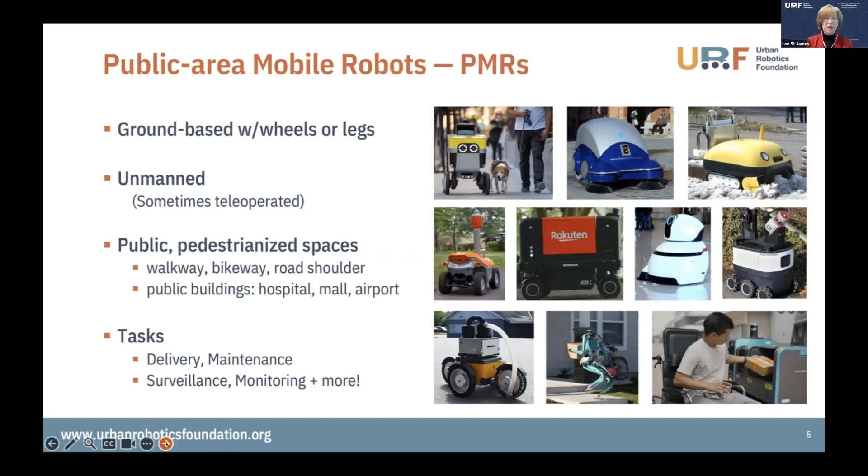So what are public area mobile robots? Our work focuses on just public area mobile robots. Peter brings a much broader perspective, which we'll be happy to explore. Public area mobile robots are ground-based, so wheels, legs, tracks - they can have two or four legs, as you can see in some of the diagrams or photographs here. They're unmanned. The key thing is that they are used in public spaces around bystanders or pedestrians, on any kind of walkway, bikeway, or public building, performing tasks that are basically unlimited right now. We have new use cases showing up every day, so we're excited to explore this whole area and help nurture the industry as it evolves.

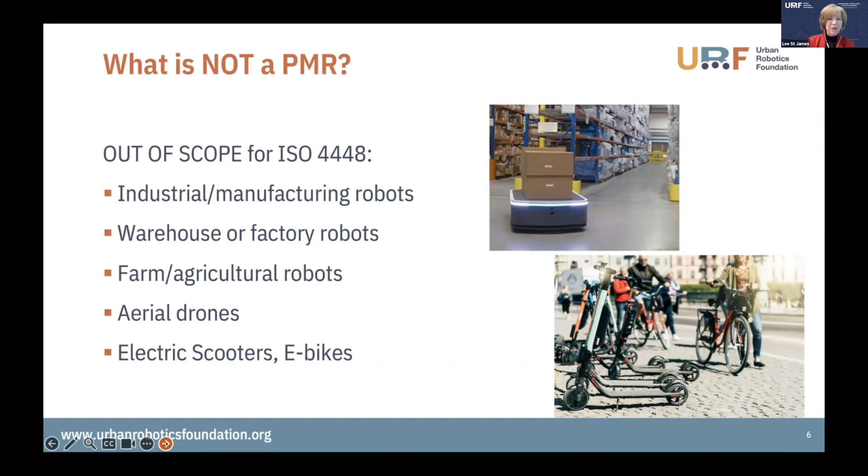What is not a PMR? It's important to realize that our work at the Urban Robotics Foundation is not related to industrial or manufacturing robots - those used in warehouses, factories, farms, or agriculture. We also don't deal with aerial drones, e-scooters, or e-bikes. However, the learning and the work that we do can certainly be leveraged, and there are some principles that are of benefit from understanding our work.

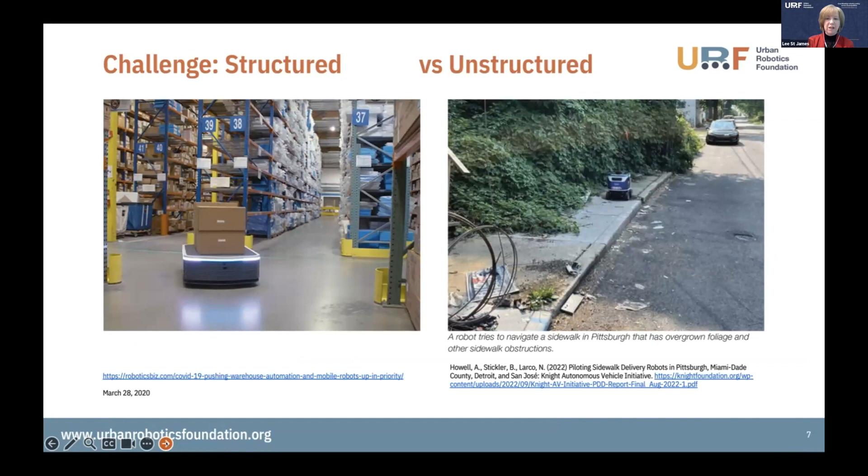The key challenges related to mobile robots really relate to the unstructured environment in which they operate. Here's an example from a sidewalk in Pittsburgh that was part of a pilot study published by Knight Foundation. We also have challenges around failures of the devices, and failure is part of the development of any industry.

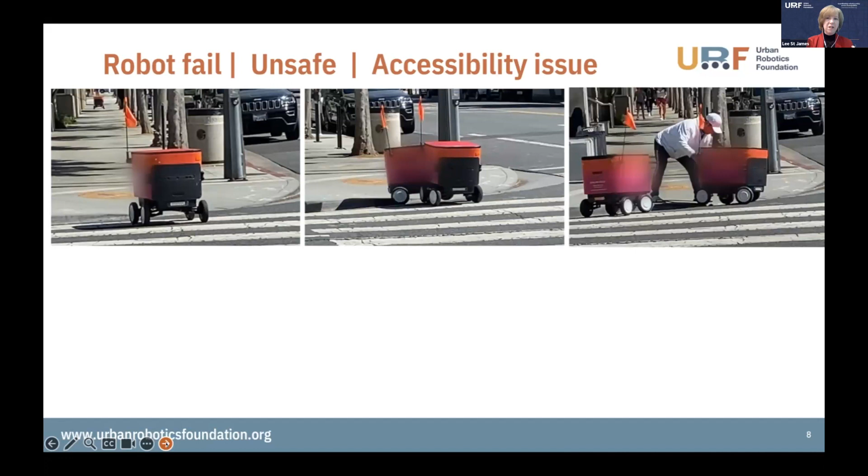So it's not sort of the end of the road, but it really is that we need to understand, as those failures happen, how do we ensure that people are not made worse off? Here's an example, some screenshots from a video taken by one of our researchers.

Of a robot that's crossing a street. It fails, another robot comes along to help it, and then a pedestrian, a bystander, just tries to help. He pulls it back onto the sidewalk, and another pedestrian comes to help. But then what they do is they leave those robots in the accessibility space, so if you were in a wheelchair or had a child with a stroller, you would have difficulty getting up onto the sidewalk. That's a key example.

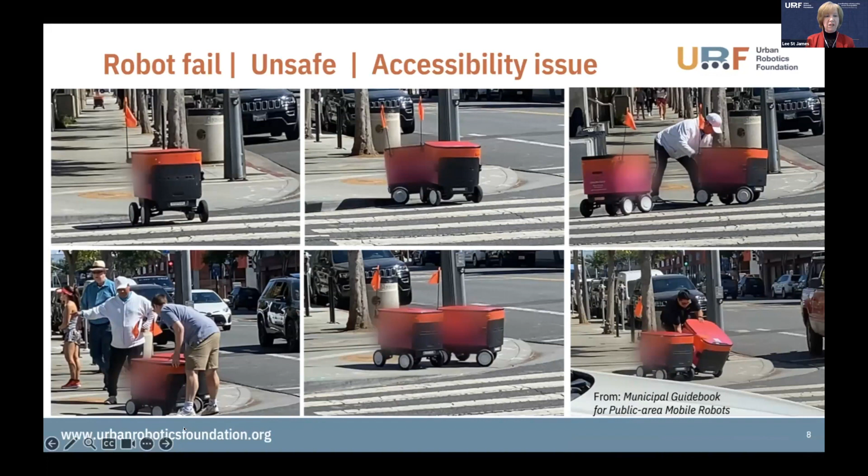These robots are teleoperated, and an employee from the company actually comes to take away the one that is disabled. The robot that was still in working order goes to proceed across the street, and then what it faces is actually a driver error. This driver pulls into the intersection even though there's a red light. The robot is there, and then there's a car that comes to turn behind the robot, so the robot is kind of trapped in this situation.

And what it does is it goes out into the main thoroughfare, and it's potentially a very dangerous situation. It's not clear that the driver of this car actually knows that the robot is there, and yes, there's a little flag here, but are there best practices or standards and ways that we could help flag this and account for some of the human errors that are natural in our society.

Could a PMR deliver groceries to her? Could it actually carry her bags in a follow-me kind of format? Or could it maybe even protect her and follow her? So, opportunities and challenges, and that's sort of a good segue into what our guest speaker is going to be talking about today.

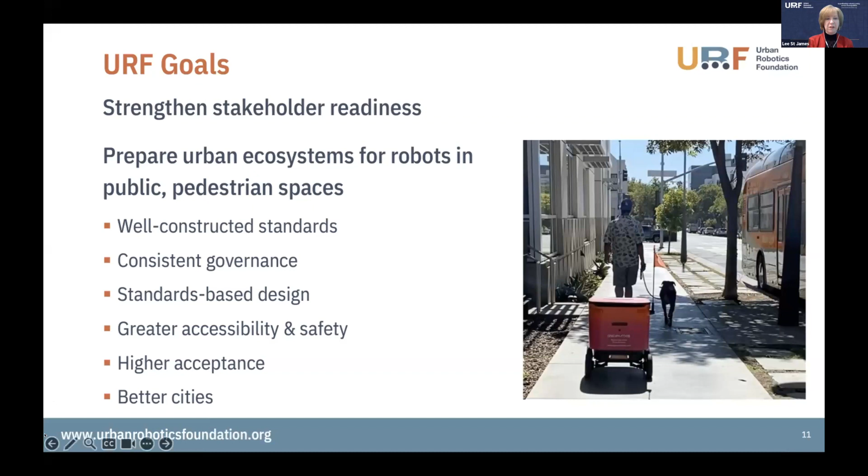A final slide before we hand it over to Peter, to really just make sure that all the people attending today understand that with the Urban Robotics Foundation, our goals are really to strengthen stakeholder readiness and to prepare urban ecosystems for robots, so that through well-constructed standards and consistent governance, we can support the industry growing through standards-based design and deliver greater accessibility and safety, higher acceptance, and better livability in our cities.

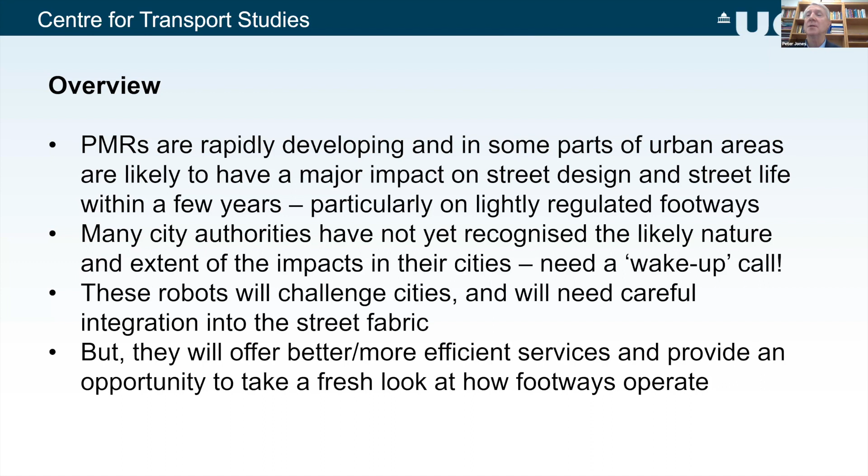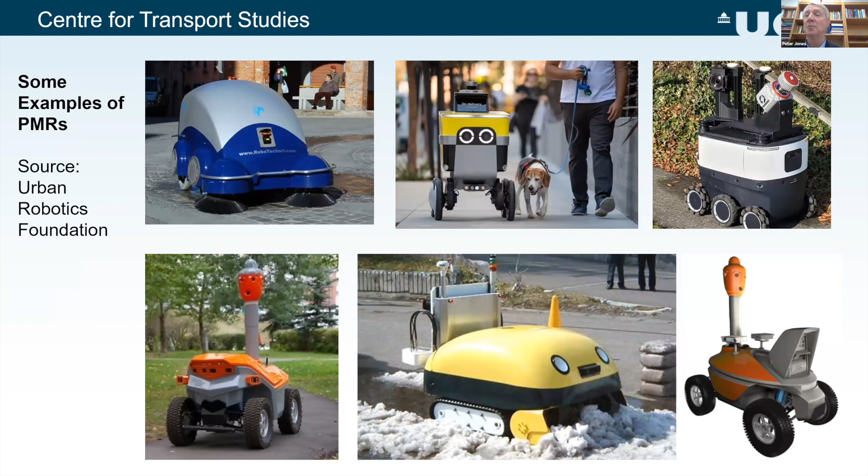These new various types of robots will challenge cities and will need careful integration into the street fabric. But as Lee said, they will potentially offer better, more efficient services, and also provide an opportunity to take a fresh look at how footways and sidewalks actually operate. You've already seen a similar photograph from Lee, just making the point that there are a variety of potential uses, not just last mile deliveries, but also snow clearance, street cleaning, and other forms of support and so on. And of course, there are a whole range of environments in which these might operate.

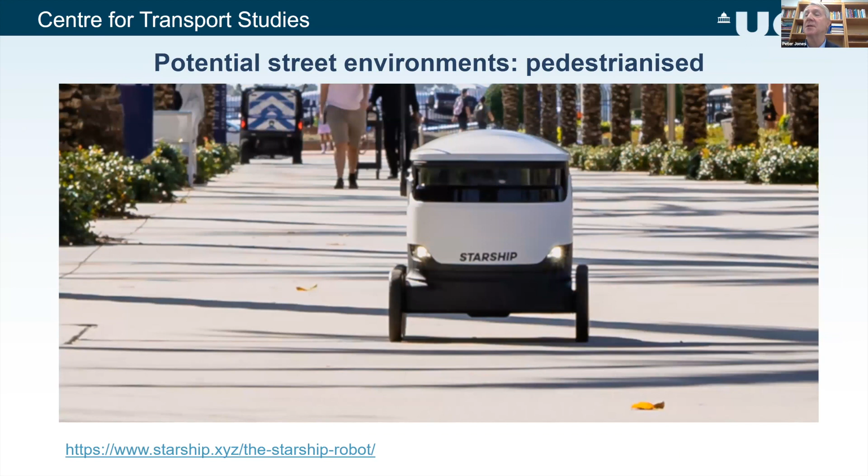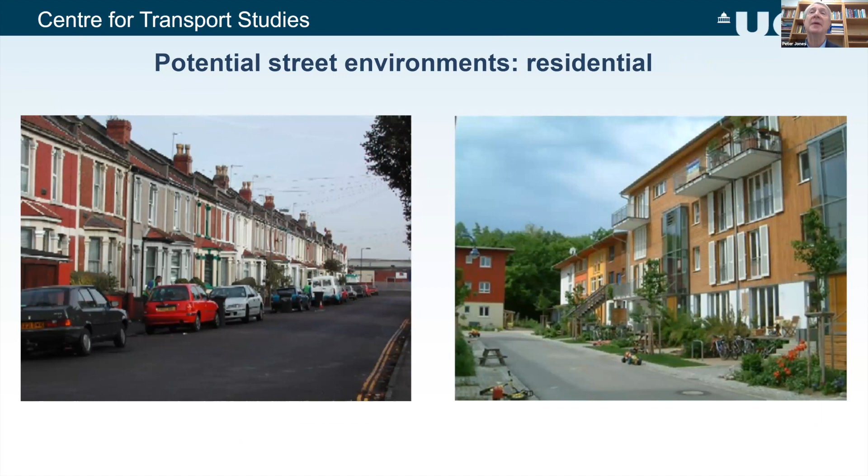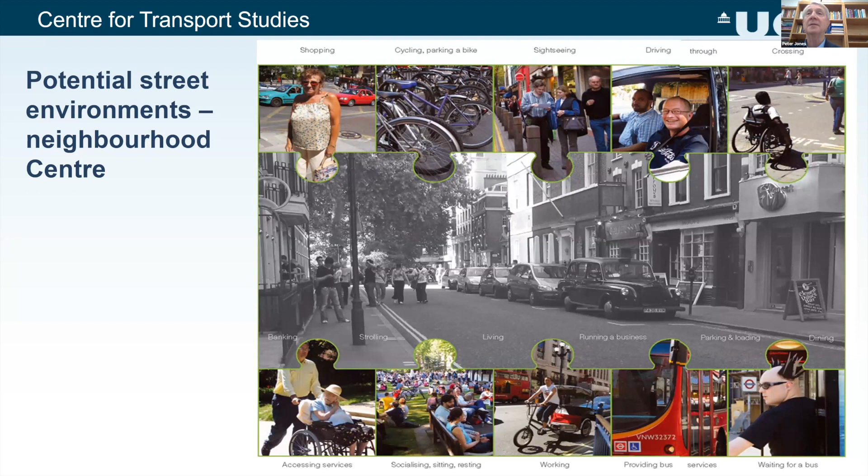So I see from a sort of city point of view, really three main challenges. First of all, how to accommodate PMRs on footways, sidewalks, among a wide range of pedestrian movement and street activities. Just how do their movement fit in with other movement and people doing things on streets.

Secondly, the physical design of the footway, sidewalk, and carriageway crossing facilities. What type of facilities are needed to physically enable them to be able to operate in those environments?

And then thirdly, building on the different components of the street network, will we end up designating preferred or possible or prohibited routes? This has already been an issue for a number of years now, where local authorities, certainly within Europe, want to minimize traffic going through residential areas, whereas sat-nav systems actually often, by offering the fastest route, actually encourage cars to go through residential areas. There's quite a tension there, and there's equivalent potential whether PMRs will also produce those challenges in cities.

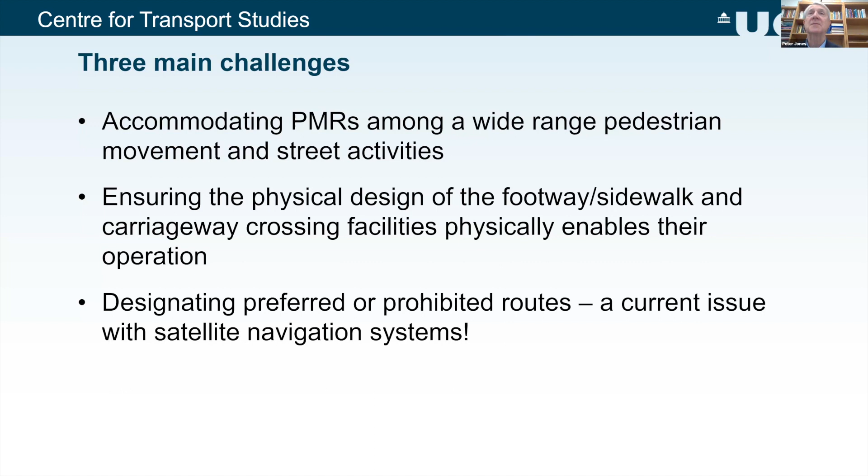So taking the first of these, existing pedestrian movements, street activities. At the moment, if you take footways, sidewalks, then you look at what happens there. Pedestrian movement and street activities are generally unregulated, except where you've got very dense pedestrian movements, and then crowd control becomes important.

Now, PMRs will need to be regulated to some degree, particularly if they become autonomous in terms of the paths they take along the footway, where and how they wait to cross pedestrian or potentially cycle crossings. Now, if you're going to start defining paths for the automated PMRs, then implicitly you're also saying something about what that means for pedestrians on the footway as well.

And so I think there's a real issue for cities here that if the algorithms that are used to define paths for PMRs to use on footways and cross the road are determined by the operators and the developers, implicitly that will in effect determine what spaces are available for pedestrians. So the question is, should the cities actually be taking the lead and deciding how to slightly formalize the use of footways and sidewalks, or should it be left to PMR operators and the technical regulators?

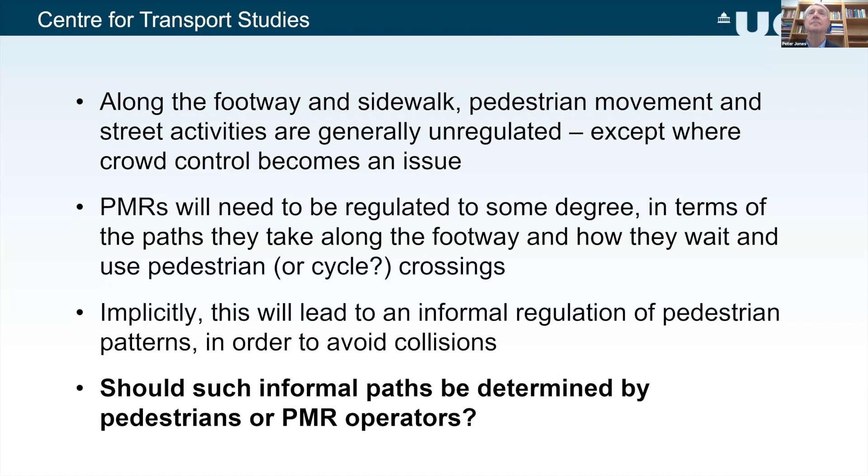The other important thing to bear in mind around is, as I say, not just movement, but our busiest streets are destinations in their own right. And they attract a whole range of street activities on the sidewalks.

Some more formal, like market stalls and so on, but most informal, people just having a rest or chatting to friends or something. And these can occur almost over the entire footway between the edge of the curb line and the back of the footway next to the buildings. And they might not leave a clear path for PMRs. So again, will there need to be designated areas where people congregate to keep those clear paths?

And on top of that, many what we call street activities require what we call street furniture.

For example, we may have benches on the street so people can rest easily, or we may provide trees partly to provide shade. Not only does this street furniture take up space which is not available for movement, but it also has its own footprint, as I'll demonstrate in a minute. As PMRs are not as likely to be as agile as pedestrians, this places extra restrictions on where street furniture can be placed and how these elements on the street are laid out.

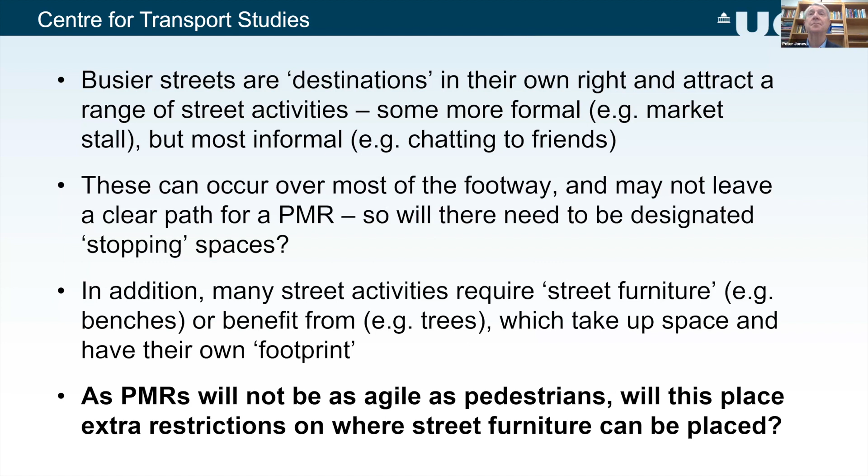Street activities can be all over the place. Here's an example from central London, Covent Garden, where one of our MSc students looked at the types of street activities people do - reading, playing on the mobile phone, whatever - and how many people tend to be doing that and where they tend to be doing it on the street. As you can see, it's almost all over the street, and at the moment there's no real regulation for that.

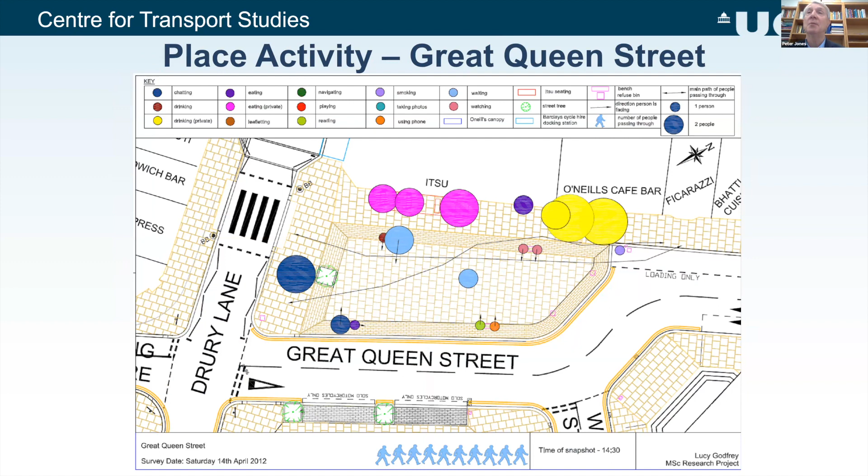And clearly, with loading, there are issues about the curbside being a very busy area. At some point, the PMRs will presumably come off a van or something, so the question is where there's going to be space to do that in environments that are very, very crowded.

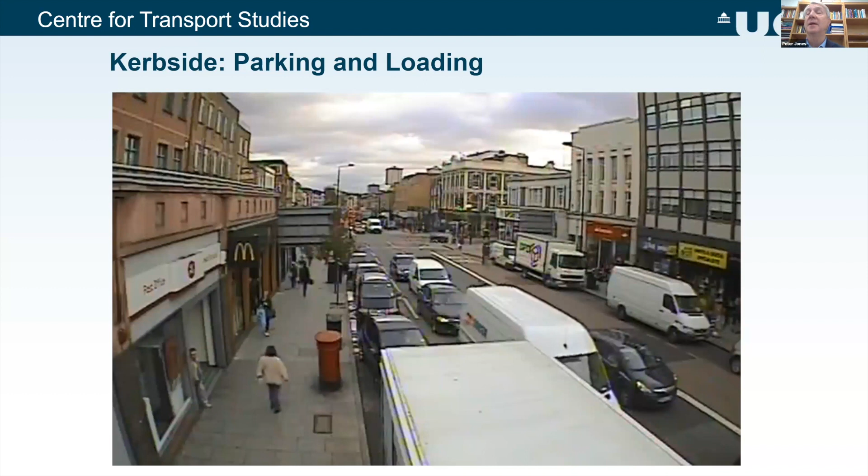If you look at what happens on our streets, on the footway there's a whole range of things going on. There are services provided that relate to the street as a place or destination - retail market stalls, less so now, but newspaper sellers, communications, post boxes, internet things, cash point machines, public transport stops, shelter seating, toilets, waste bins, seating, public art, greenery.

And then there are things not so much associated with street activity but with movement, which are nevertheless part of the footway - street furniture such as signposts, route information, tactile paving for people with low vision, CCTV, lighting columns, and so on.

We also tend to have a regulation, at least in the UK, that any piece of street furniture has to be set back from the edge of the curb between 450 and 550 millimeters, because large vehicles passing close to the curb have wing mirrors that stick out and would otherwise knock into lampposts and things like that.

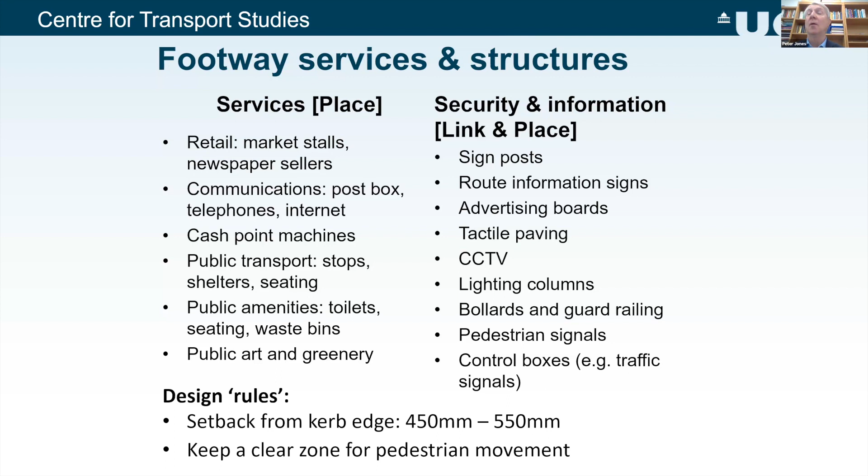So all these different features on the street are not just taking their own space, but quite often taking up extra space. If you have a bus shelter, quite often people will stand behind or next to it. Down to simply bins - if you have a waste bin or trash bin, quite often we find people start leaving other rubbish around there, bags of rubbish and so on. So it's not simply a question of how much space is taken up by these elements, but how much extra space is actually taken up when they're used.

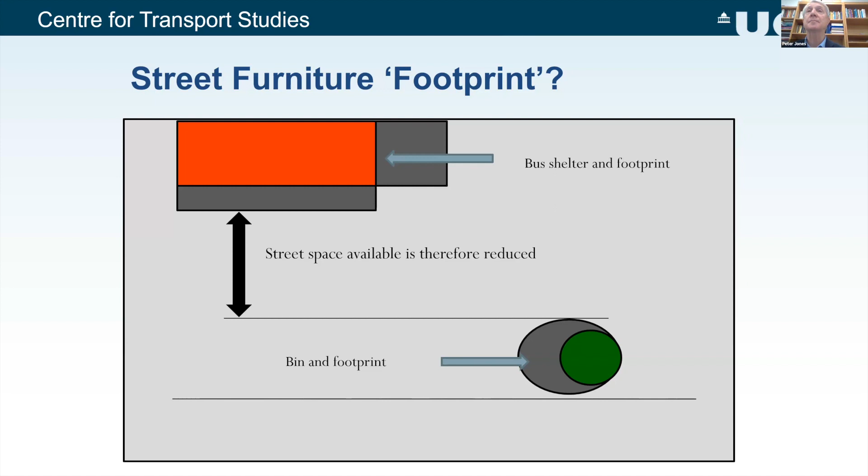As I was saying, pedestrians are fairly maneuverable on the whole, but with PMRs the maneuverability may be less, and maybe this needs to be taken into account. Here's an example from one of my MSc students who looked at central London - I won't go through it all, but for example, the cycle stand I showed you just now takes up about 0.1 of a meter by 0.6, but when you've got a bike there, it's 0.6 of a meter by about 1.3.

And the same with benches. When you've got people sitting there with shopping etc., it needs a lot more space. So I think if we're going to have clear paths for PMRs, a lot more thought will need to go into this in the future.

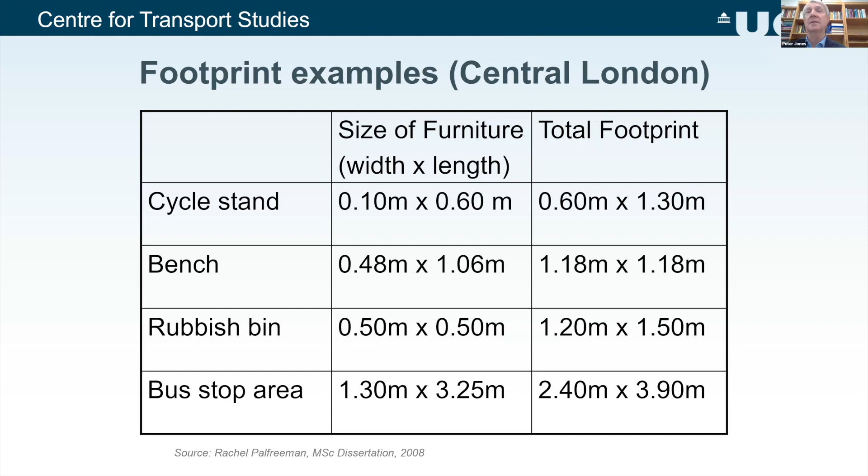The other point I want to make, and you won't be able to read the details of these photographs, is that the same street can look very different at different times of day and night. At peak hours there'll be a lot of people going from transit stops and metro stations. In the evening, particularly in summer, people will be outside having a drink. So even the same physical infrastructure is used very differently at different times of day, and that's a different environment in which PMRs will be operating.

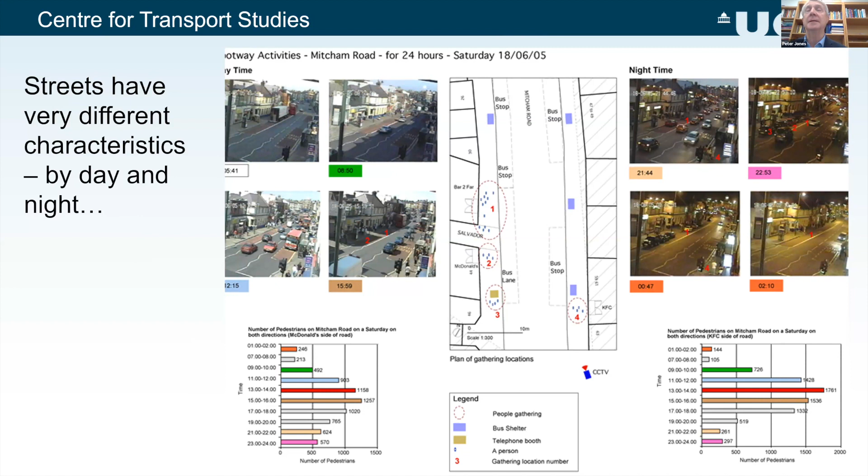That leads on a bit more specifically to physical design requirements, and here there are a lot of things to take into account. Two primary dimensions: one is the physical dimensions and slopes of footways and crossings. What are the minimum widths we need? Clearly, if PMRs are not going to be in exactly the same path as pedestrians, then potentially the minimum widths might need to increase, at least on key corridors, and we also need to provide for street activity.

A point that Lee made about queuing space at crossings, and also what's the maximum crossfall - that's the angle on the footway from the curbside to the building line, which needs to be there to some extent so that rainwater drains off - and also the maximum slopes that vehicles might go up.

And then, of course, there's the whole thing about the quality of the surfaces themselves and the quality of the drainage. How even are the surfaces? How good is the grip? And as I said, how we deal with drainage.

Here it might be that PMRs actually help to improve conditions for mobility impaired groups, particularly people in wheelchairs or people with buggies, if they're happy to mix. Because for decades many of our sidewalks and footways haven't been well designed for buggies or wheelchairs, but maybe the extra pressure and commercial pressure for making PMRs possible might mean conditions improve for other groups that need high quality surfaces too.

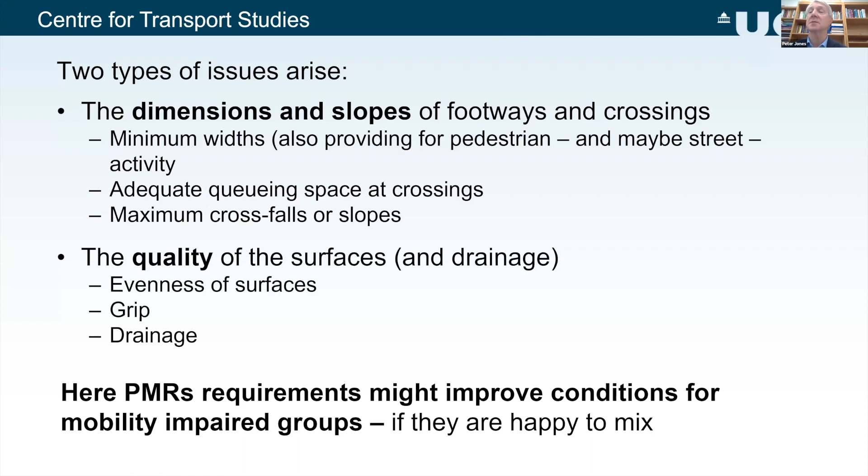This is an example - at UCL for a number of years we've been doing detailed work looking at how people maneuver on different surfaces. On the left-hand side is an example of experiments done with people in wheelchairs, looking at how maneuverable they are coming off buses, trying to turn around, or on slopes, what sort of slopes they can deal with, and so on.

We had a fairly small facility for a number of years, but a couple of years ago UCL introduced a literally unique facility in the world called PEARL, the Person Environment Activity Research Laboratory - essentially a large warehouse, 40 meters by 100 meters. You can see part of it there inside, where you can recreate any physical environment at more or less any scale, and next year they're planning to recreate 100 meters of high street so they can test all sorts of things.

So there would be possibilities to use facilities like that to actually test tolerances and perhaps come up with design standards for particular cities or countries to specify the requirements of PMR capabilities.

Also on that, they've just finished a series of trials with one of the major e-scooter providers in the UK, trying out different noises to see what sort of noise would be useful on crowded footways to warn people that e-scooters are coming, without being too intrusive but standing out from background noise. That's something the company is now incorporating.

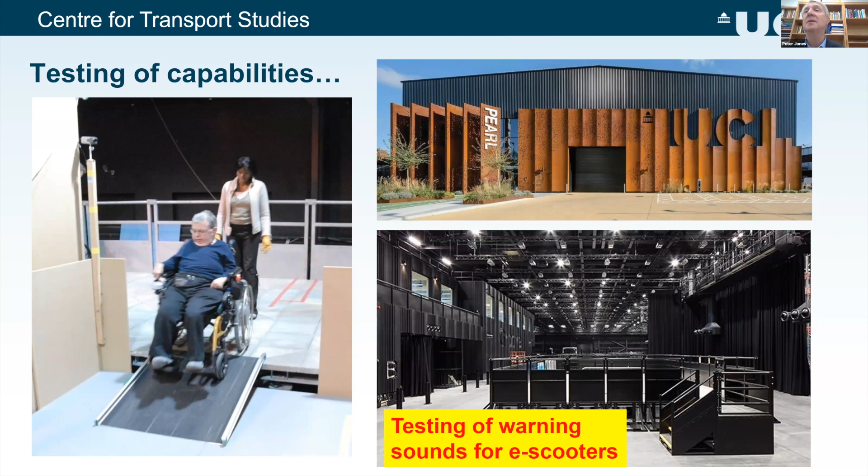So these are real challenges, but there are facilities around the world, and UCL has some of those, where these things could be tested so we can be fairly confident how people will interact - you could recreate a street with lots of people walking and PMRs trying to navigate among them. And that leads on to the whole question of routing of PMRs over a network.

Do we assume they'll be able to use every single street and every single sidewalk, every crossing, or will that not be possible? That really raises the question about whether there'll be a need to carry out an audit. The example Lee showed of a PMR being stuck, we don't really want that to happen very often. So maybe it'll be necessary for cities to carry out an audit to look at which streets are suitable for PMRs.

And the next few slides, well, let me just go on to this. So essentially, you might end up with restricted routing for two reasons. One is the physical one I mentioned, that they're inaccessible, too narrow, too steep, or whatever. But also there may be other sections where although physically you could accommodate PMRs, they would be seen as sensitive and you wouldn't want them there.

For example, outside schools where children are leaving the site at start and end of day, you might not want PMRs going through that area at that time to avoid clashes with school children. As I said, it would probably be necessary to carry out street audits. There's a lot of previous experience we can draw on, not just the work I showed you in Pearl, looking specifically at the maneuvering capabilities of wheelchairs or PMRs and other mobility restricted groups, but also how you might go about creating audits.

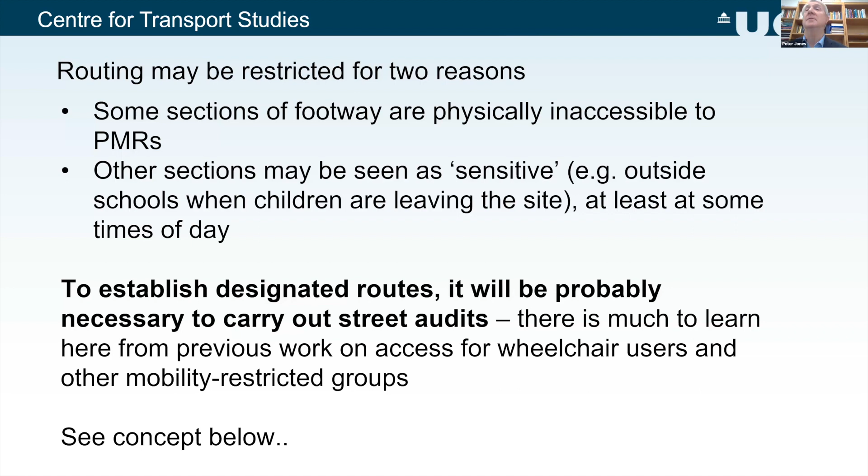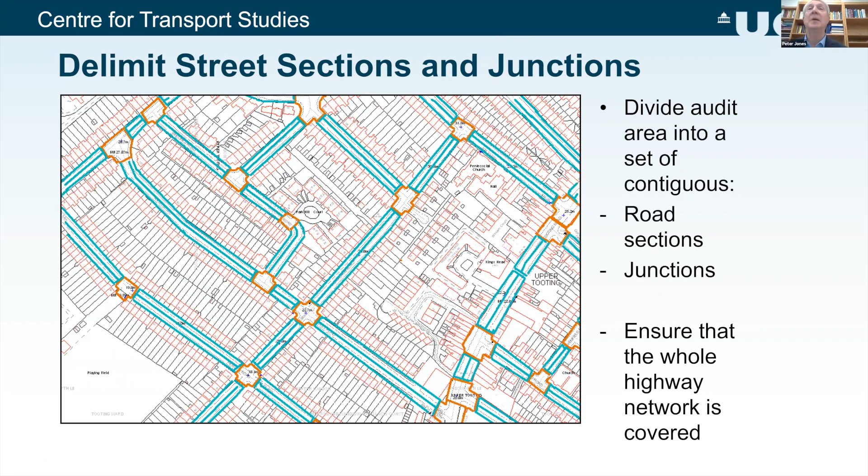So here, for example, is a link, a section between two junctions of footway. On the footway, there are a number of things we can look at to do with the width, slopes, surface conditions, etc. But also we want to know how that interacts with the frontage—in other words, how it interacts with the building itself. So if you have a PMR, can it then access into the building? What does it mean in relation to the curbside?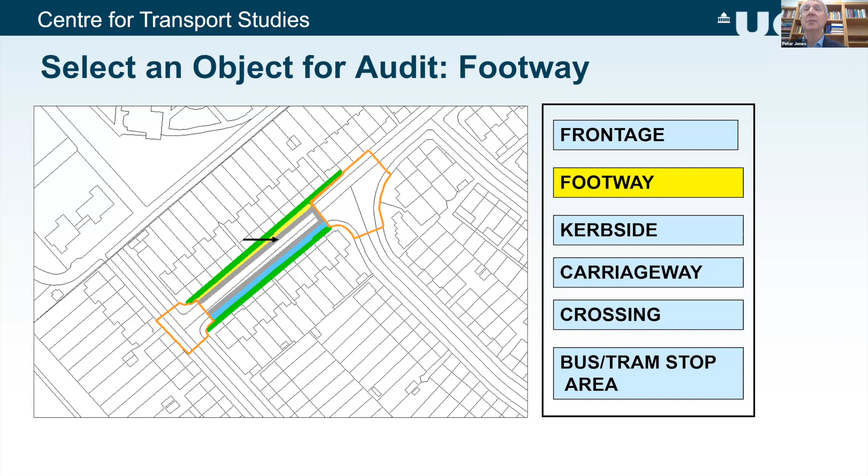And then we're also looking separately at the carriageway, where the vehicles move up and down, the crossings, and maybe special areas like bus or tram stop areas where we have to allow for particular types of maneuvers going on there, and people waiting around and so on.

If we're looking at footway, we could then not just look at the character of the footway itself, but also the street furniture that might be on it—lampposts, traffic signs, toilets, public art, etc. For each of those, potentially look at their characteristics in terms of the amount of space they take, and their footprint, to see how much space they're taking up in total on the footway.

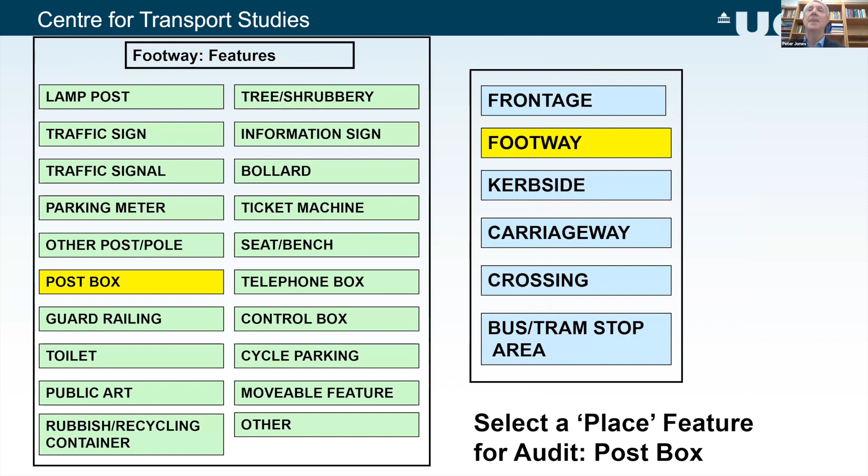Having got that information, you might define two different groups. We were thinking of people in wheelchairs, for example, maybe manual wheelchairs, electric wheelchairs, or people with walking sticks and so on. But again, it might be that you have a different set of standards and capabilities for small PMRs and large PMRs, or something like that.

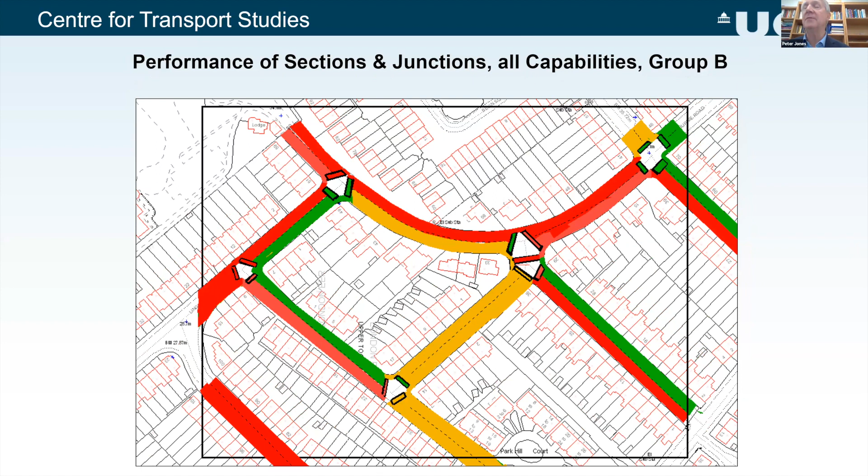To give you a specific example from one of my MSc students recently who worked with the City of London, this is a small area around the Barbican, developed in the 60s and 70s, where some footways are actually elevated. The student looked at each side of the road separately as a link, and each junction point as a footway node.

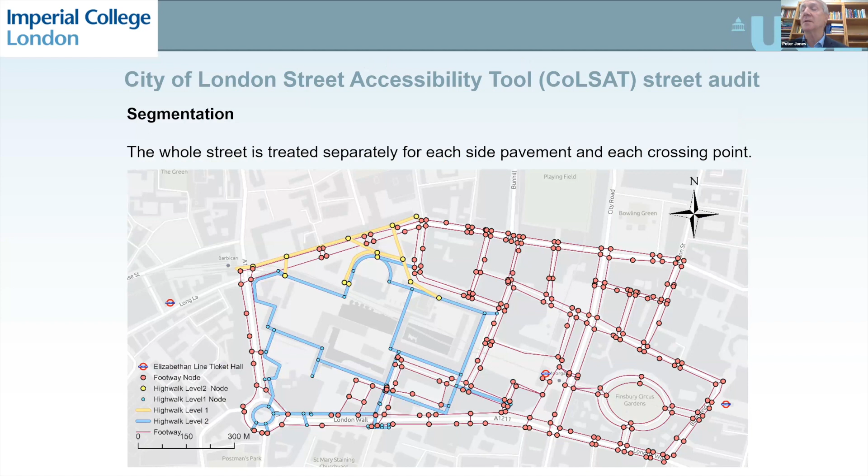They spent a lot of time looking at each crossing, each component of each crossing, and each footway on each side, measuring the provision along each of those sections and junctions according to a set of criteria.

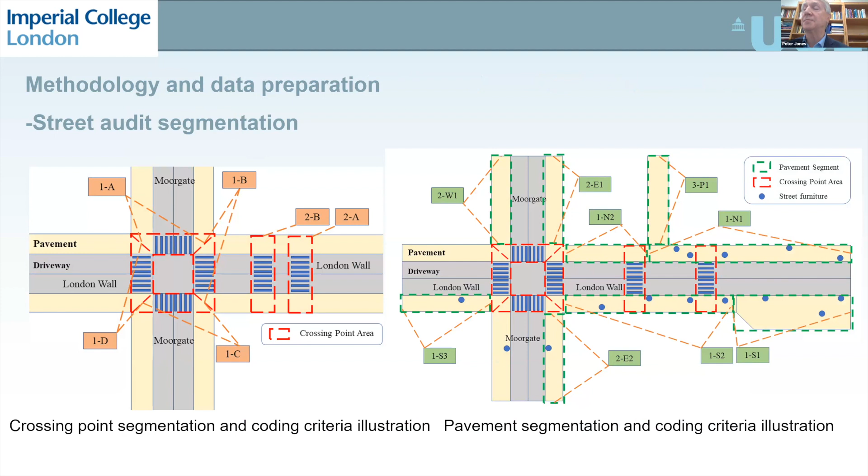This is just to give you an idea, I'm not suggesting you get into this, but the City of London had commissioned a Street Accessibility Tool, where they identified a whole range of people with different types of disability - people in electric wheelchairs, manual wheelchairs, walking frames, and so on - and defined their capabilities, so we could match different street sections and junctions to see whether each group could cope with that situation.

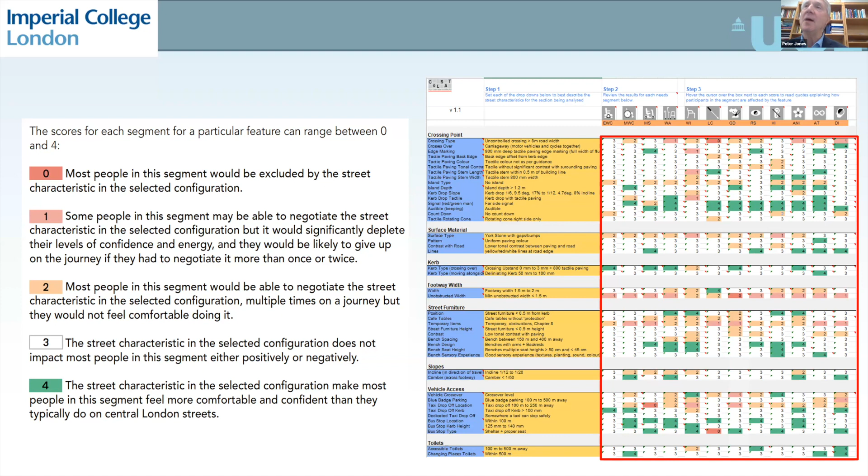PMRs are different, but there might be an analogy here that we could think about developing.

Again, you don't need the details, but we took examples of places that people with different mobility restrictions might travel to and from in the City of London. We measured the most direct routes from A to B for an able-bodied person in terms of distance and time, and then for people with restricted mobility, like a guide dog user or someone with a walking impairment, we could see that some junctions, crossings and sections wouldn't be accessible to them.

In these three examples, on average their distances are about 30% longer and journey times about 30% longer than for an able-bodied person, because a number of those sections and crossings were not actually accessible to them.

In conclusion, I think it's very likely that PMRs will appear on the streets of many cities within the next few years. My concern is that if cities don't take the initiative and decide how they want their footways to operate for pedestrian movement and street activities, then the need to develop rules for PMRs will indirectly define how footways are used by people. This is a major challenge, but also an opportunity to improve the design quality and functionality of footways.

This could benefit disability groups and other street users, and possibly partly fund the improvements, auditing, and upgrades through industry fees for permits to use those streets in urban areas.

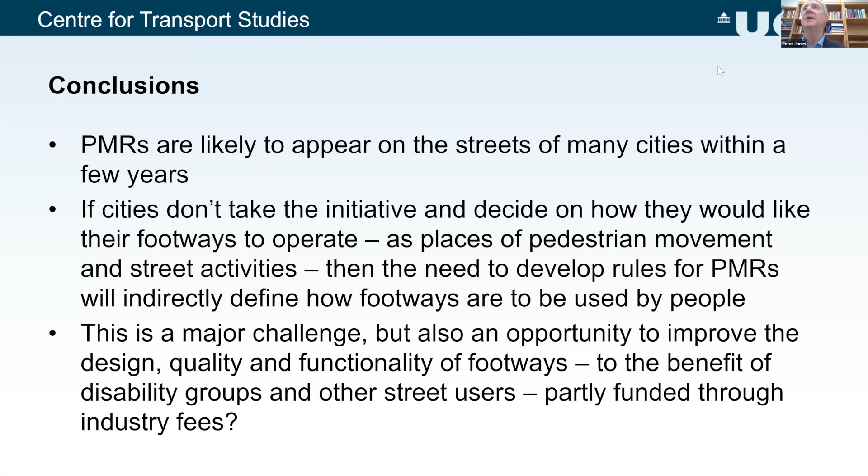Thank you so much, Peter, that's wonderful. I'm going to now ask Bern to unmute. Thank you so much, and thanks, Lee. Peter, thank you so much for that, that was very thorough, and I learned some things. Even though I've been at this for several years, I still learned more. I do have a couple of questions I want to ask you about some of my favorite topics from your talk, and if anyone has questions, I'll interject those as well.

But let me ask quickly, I just have a couple of questions. First of all, you observed very clearly that the footprint surrounding street furniture is more expansive than the objects themselves - they take up more navigational space than one might expect, especially when they're occupied and full.

So my question is, how optimistic are you that we can make way for robots in our densest areas, specifically some of the downtown places that are very busy at certain times of day? Do you think we can? Do you think planners can devise a formula for cities to determine when and where robots are suitable? You're such a planner yourself - do you think you can describe that in a way cities can take that information and make decisions?

Will that be easy for cities to do? It's something most of them haven't thought about, but that's the point I'm trying to make. I think we need to be thinking about these things now rather than being caught out. Many cities got caught out by e-scooters because they didn't think about them beforehand. I think the thing is to avoid that with PMRs so that cities are ready and can collaborate with developers and operators. That's probably quite important.